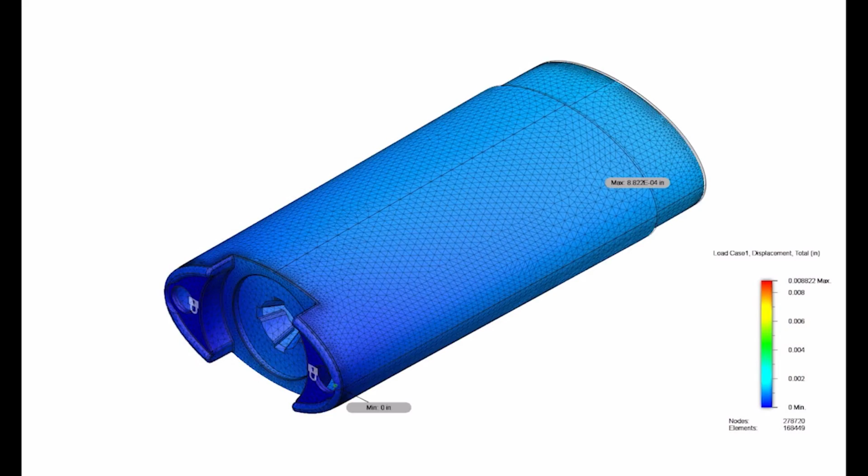As we've said before, when our customers work with Plastek, they don't get just a molder that molds parts. They get a partner in their complete package design process that includes industrial design, product design, mold design and building, molding, value-added assembly, and where desired, decorating. They also get a high-quality partner connected to some of the greatest companies in our industry that will keep you and your company on the leading edge.

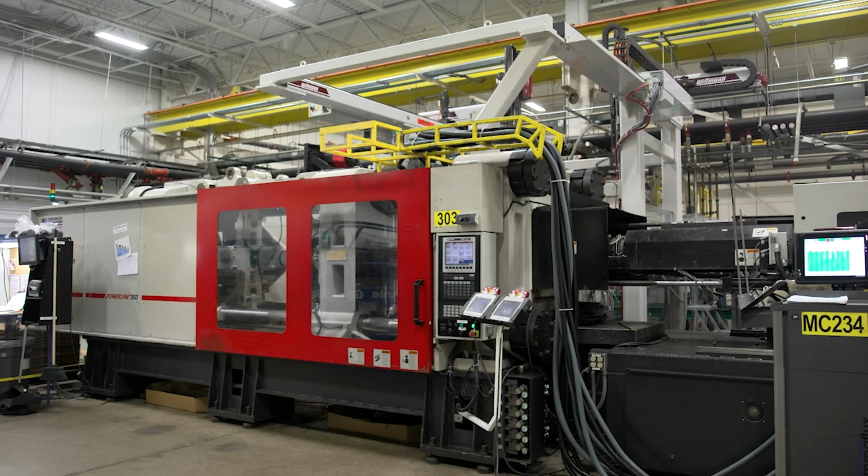Another such company is Milacron injection molding machines. Milacron has been a key Plastek supplier for many, many years, going back to our first order in 1989. Their machines have provided great productivity, and their service on the occasion it's needed is very robust and attentive. They stay ahead of the game in technology and introduce new features that continue to push the limits, help reduce energy consumption, and provide more value for our investment.

Some of their newest offerings include data acquisition, predictive analytics, and machine optimization. As we all set out to perform to the best of our abilities, it's important to have information and feedback to act upon, and having the ability to collect this feedback in a timely, efficient, and resourceful manner is something we all need. Today, I want to introduce you to Eddie Jump, Digital Analytics Leader, who will present proven M-powered applications that provide real-world results. To everyone watching, good luck and happy learning.

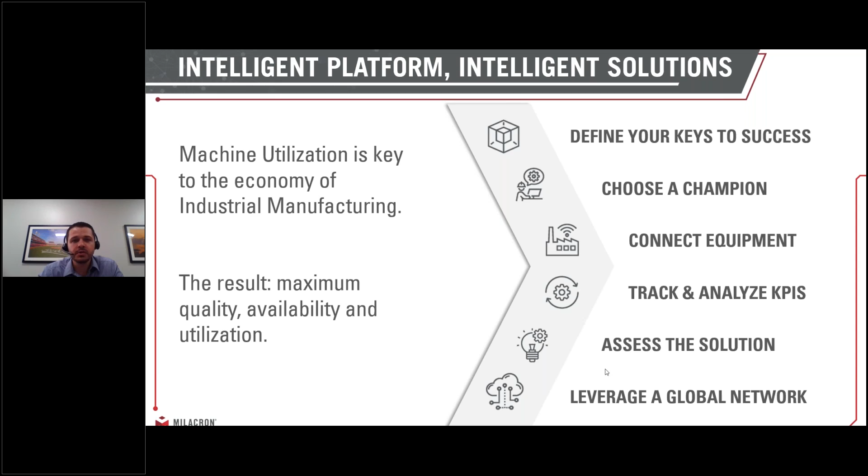From there, it's important that we continually assess and evaluate what we're doing. So we have things like dashboards, push notifications, different things we do with IT teams and our customers, so that we're making sure they're getting tangible benefit from what they're putting into the system. And then on the backside, the most important piece for this presentation, is how we leverage that to benefit all of our partners. We're building a solution that we think is how we'll service our customers and become a better partner in the future. So how do we leverage all of that and push that to all of our partners?

So our next slide here, we wanted to give you a little background on how we do it. It's important to understand what it is, but most people start asking: how do you talk to the machines? How do you deliver that information? It's really through our unique approach of devices and interfaces. Our devices, things like the Amphion and the Symphony that we've partnered with EI3 on, allow us in real time to not just look at machine data and process it, but change it on the fly. So as needs advance for the customer, we have the ability to alter those devices directly from our plant and become smarter about how we service the customer.

From there, we have an industry-leading secure platform that collects all this information and anonymizes it so our customers are safe, secure, and protected. We study that information and figure out how we can push these things back to the machines in an efficient manner. How do we do these things efficiently so that we're able to push those back to the other machines in that global network? I've got a dashboard that shows some of the ways we push that information to customers, but I'll talk about that in greater detail in later slides. We just wanted to show you some of the visualizations we create.

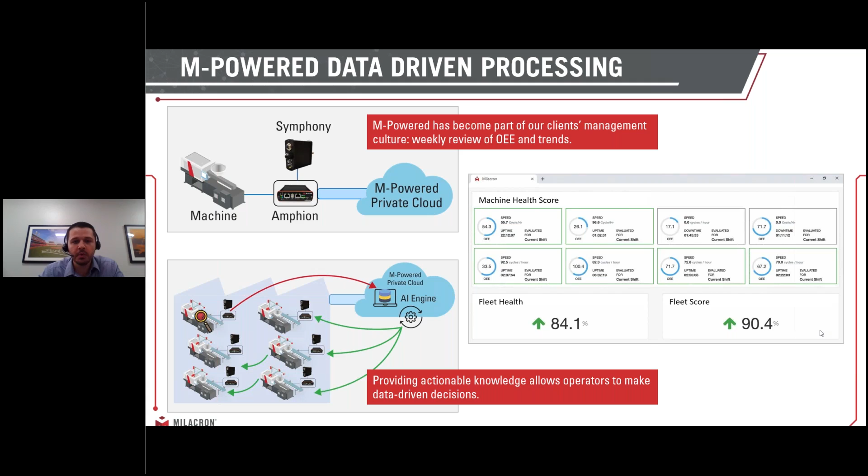Before we jump into exactly what we deliver and some use cases, I want to say at a high level where we're coming from and set the stage for what we'll talk about. The term we've coined, that we really love and use more internally than even with our customers, is Plastinomics - making sure we're focusing on the economics of molding for our customers. I think everybody understands what safety, quality, delivery, cost, and even sustainability mean. But being able to keep that in mind and make good economic decisions through the data to improve each of those metrics, and not just improve them but do it in an economically sustainable way, is very important for our customers and our partners.

So before we jump into each of these categories and discuss how we help with our applications, I'm going to turn it over to Lacey real quick for a quick poll.

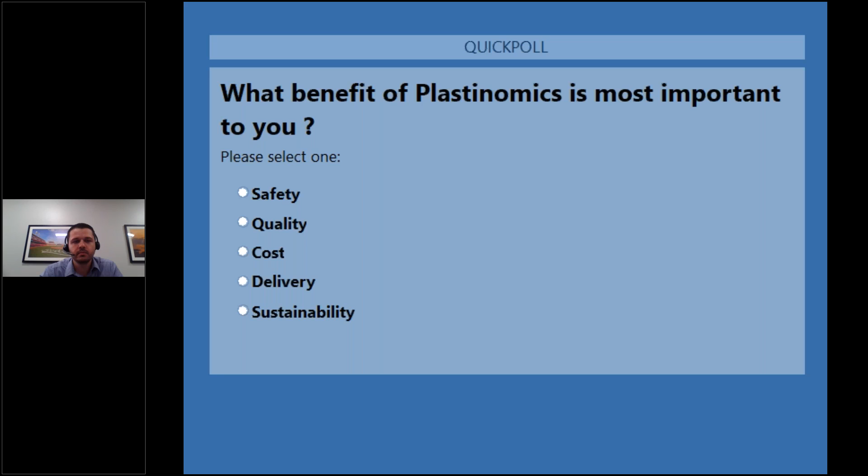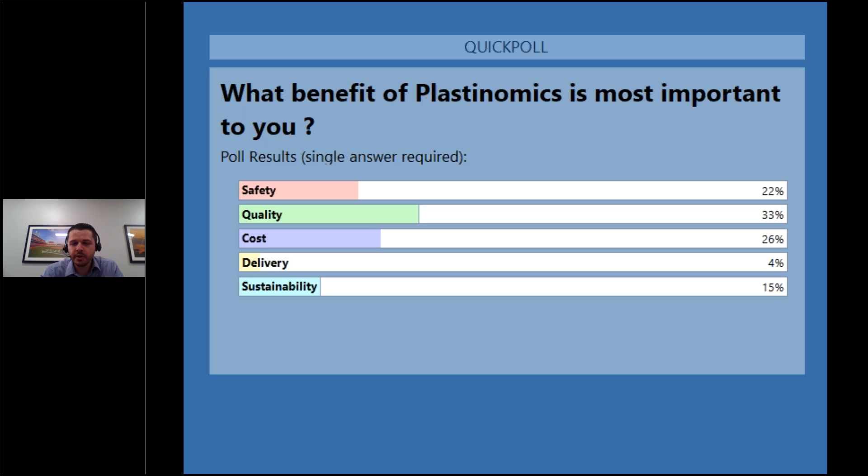Alright, let's close this and share the results. It looks like, Eddie, we have over a third of our audience speaking to quality, and then the second was cost, and the third highest is safety. This is great, and I appreciate everyone's feedback. I'll try to spend a good amount of time on the ones that I know are most relatable to this audience. So we appreciate the feedback. Thanks, Lacey.

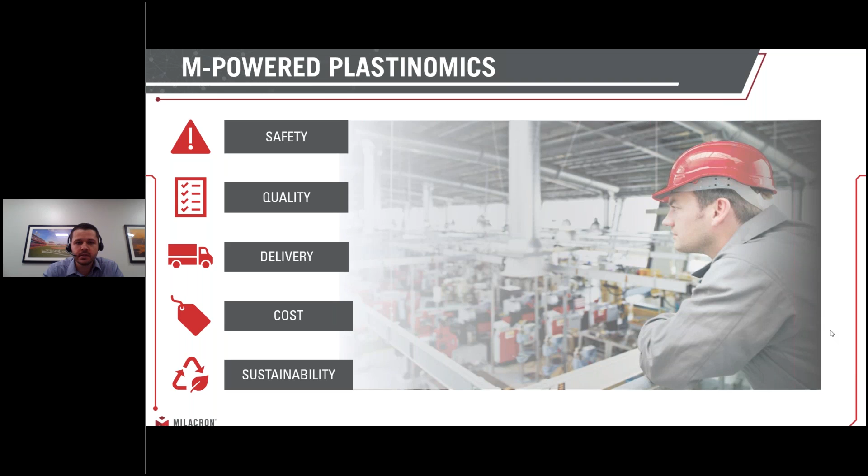All right, so first we're going to start with safety. With safety, there's a lot of things we can bring into the space with our platform and these devices. When we first started the system, really what we wanted to do was find a way to connect our technicians with our customers quickly. It's very important for our customers and for even their end customers that our machines are always running. With that, our platform allows us to safely and securely connect back to our customers' assets.

So it's a fantastic tool for fixing issues remotely. We actually find in two out of five of our issues we can fix completely. And the ones where we can't, we're sending technicians into the facility with the correct tools, the correct information, correct parts if necessary to fix that problem and reduce the downtime. The way we're basically moving into the 21st century, especially with things like COVID in mind, is how do we take advantage of tools like this so that we can not only do that for Milacron, but also do that for our partners.

So we're expanding this toolkit continuously so that even our customers can get access to screens remotely from their desks. In a world where we have a second resurgence, and we're not to the point yet where there's a big cure out there, we need to make sure our people are safe and they can still get out and make components. We like to make sure that if you need to operate with 20 people on the floor versus the 40 or 60 you're used to, you're able to do that, with those same tools sitting at your desktop as if you were standing there by the machine.

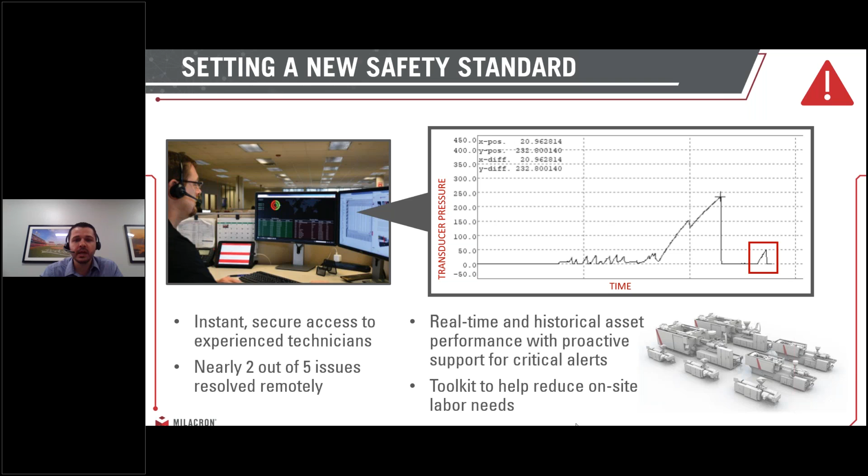So not only can we connect, but you can grab the information, the real-time process information, as well as seeing screens and guiding. I'll talk a little bit about some of the ways we're also grabbing that data so that we can take some of that legwork out altogether and push things to our customers here in some of the later slides.

All right, so this seemed to be the highest on the feedback scale. We appreciate, again, the feedback, and that allows me to dig a little deeper and spend more time on this slide and discuss how we are helping on the quality initiatives of some of our customers.

So we mentioned a little bit about how we're collecting the data. Our devices allow us to advance and learn and grow with our customers in real time. If we're not grabbing the right things, if we're not detecting the right things, it's really important to have a system in place that can not only grab that information, but change that information on the fly. If you're not pulling it at the right frequency, if you're not getting the right pieces of information, you're not going to have the right answer when it's all said and done.

So our platform, we try to keep that flexibility in mind. And then with that, we've got our private cloud interface that allows us to interact with the data in so many different ways. One of the things we've learned as we work with customers that have large scale operations, when you start talking about 40 or 50 or more machines, it's very difficult to manage process control. There are great tools within our machines that allow us to see how they're performing when you're standing there walking around, with a big workforce that can do that on a daily basis. But seeing the changes that are occurring and then combining that with quality feedback in the cloud, we have found actually helps customers improve quality from day one.

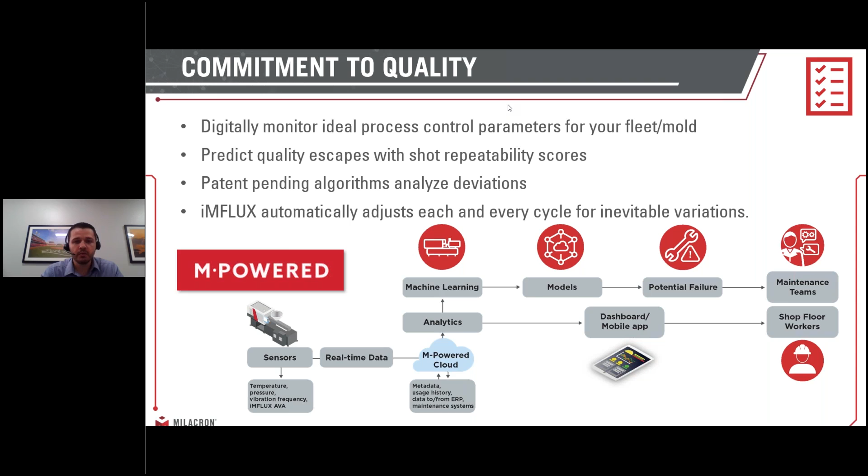As resin starts to change, you can't always guarantee that unless you're running complete virgin material with great systems, no environmental factors, you can't always guarantee what's going in is going to be the same. So there's constant tweaks on process parameters. With this technology, we're able to adapt the machines in real time and make sure you're getting adequate part weight and an adequate part out regardless of the input.

All right, so moving on to delivery. We really focus on delivery in several aspects, but really it's through performance and availability. Our tools are all about how do we help touch the customer on an automated level so they're not having to continually push information into the system, but how do we figure out that performance, availability, and quality in real time.

Then put tools in their hands so they're not having to take the machine down on an unplanned level. So basically we have smart tools built in. We have a growing number of predictive components that we monitor so that when the machine is running, we know based upon your usage and what the data is telling us when things are due, and we can tell you what that looks like from a holistic view, not just on a machine basis.

So great, I've got a tool built into the control, but seeing how that works in correlation with the other 40 machines I have running can be very difficult. So we have tools built into this platform that allow customers to say, okay, it's PM time on the 1st of the month, let's knock these 10 things out that we know will probably come due during this month, or based upon the data it says I need a new screw, I need a new screw tip, so we're not having to take the machine down halfway through a run and cause a late delivery.

So these components, again, we're trying to shift from that preventative side to the predictive side. It's growing, and we've got a lot of customers using those today and being more productive because of it.

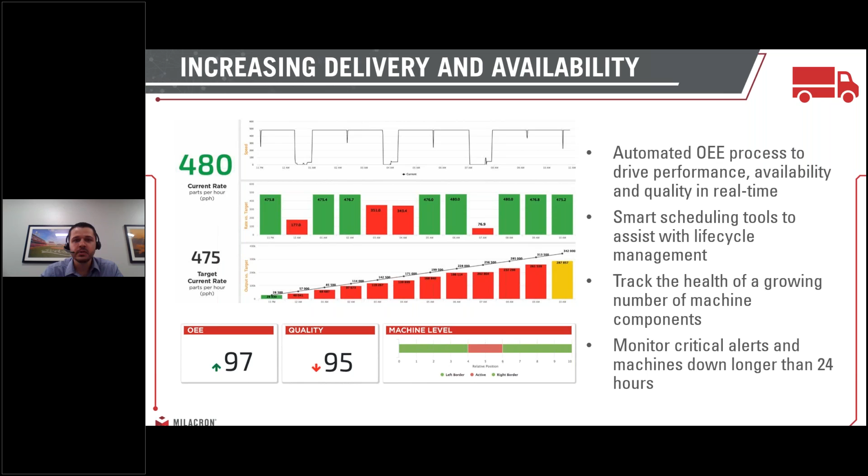So we're always looking for ways to improve that, reduce the downtime, and help customers improve delivery.

The last two slides before the use cases talk through cost and sustainability. This is where I get really excited, because I've gotten to basically live and breathe M-Powered and how we've advanced the product over the last three years, since NPE 2018 when we debuted M-Powered as a whole.

So we went from a technology that helped customers just categorize OEE, trying to help understand the basics of molding and dig kind of surface level, to putting more of our machinery-based knowledge into the system and helping customers reduce their downtime altogether. This really speaks to that.

As we went, I think we hit year two, and we said let's start putting that to use and see if we can have predictive analytics that'll tell customers when screws, heater bands, pumps, feet, and screw tips fail. That quickly turned into, great, we've got this analytic running, it'll tell a customer when we think it needs replaced, but the machine's still running, it's still making good parts. Why would I replace it? Why does that make sense?

This screen really speaks to what we've done and how we've advanced that as far as the screw analytic itself. As many people know, a screw is a part that's not necessarily going to cause a critical failure—you can still make good quality parts. It might not necessarily increase your cycle time until it's really at the worn stage where I can't get a good part out of the end.

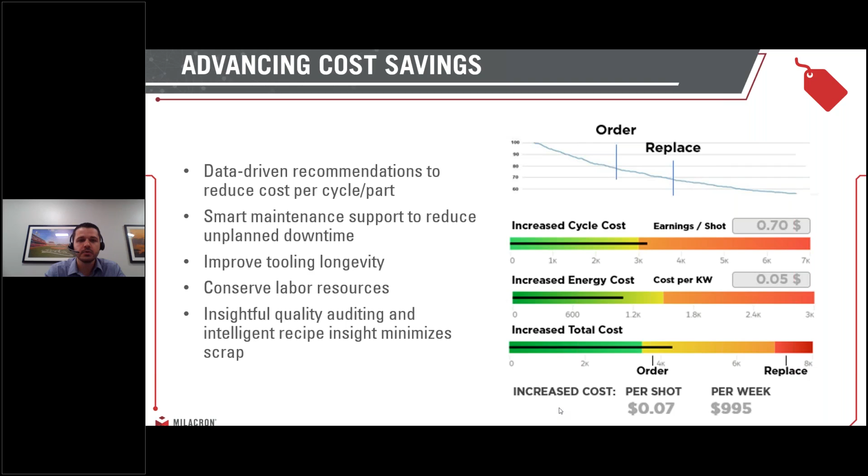Our last main topic here is the sustainability side. I saw this was something that wasn't quite the number one, but it's definitely important to this audience, and we can tell it's important to a growing number of people out in the industry.

What we want to do is not just look at sustainable strategies, but again relating back to plastonomics and making economical, sustainable goals—not goals to just go out and say I want to save all of the environment. It's, I want to save the environment, but I want to do it in a cost-effective manner so I can keep my employees, keep my machines running, and still improve the bottom line while being more beneficial to the environment and everybody around me.

So things like iMFLUX, like I mentioned at the beginning—we've got a partnership with iMFLUX, and using that technology that adapts the machine in real time, that actually allows you to use a wider spec resin, more recycled and renewable materials with the same machine and the same componentry.

So it's a key driver to our initiatives and what we're pushing forward to.

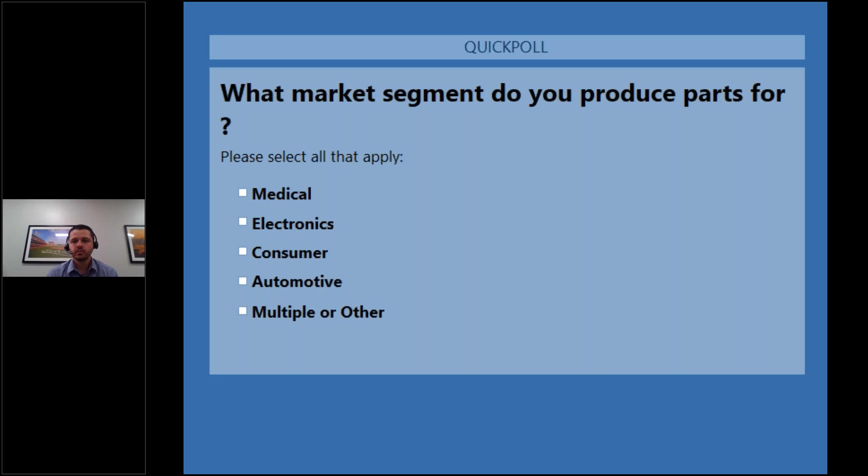Great, that's very helpful. Again, we appreciate the feedback on the poll questions, and I think that's going to help me discuss and talk about the 2 use cases we've got coming up here, but then also about how these are applicable in other environments and other things that we've done with them.

So our first use case that we want to go through is something we've done with a medical customer of ours. We found that they were getting quality issues that were not getting captured completely by their vision system at the end of the line. It was something they could very clearly find - there was not a big scare for things escaping, but at the end of the day, it was very frustrating that they've got all these expensive systems. The machine is doing what it's supposed to be doing, and yet on the other side, they're still having to spend all this time sorting out potential bad parts.

So what we did is we set up a study with them to collect data and track when these issues were occurring. First, we were actually able to see through multivariate analysis when certain things were happening in that machine. There were 4 or 5 variables that would tell us when they acted in a certain way, this quality defect was going to occur. So we're working on - and I can talk to the upstream of that and how we're going to alleviate that altogether.

But in the interim, until we can get to that point, we worked with their system and their team to develop a diverter system. So every time that we saw this pattern occur in the machine, we're actually able to divert these parts before they ever even reach the vision system or the outside when the components are coming out and dropping into their bin.

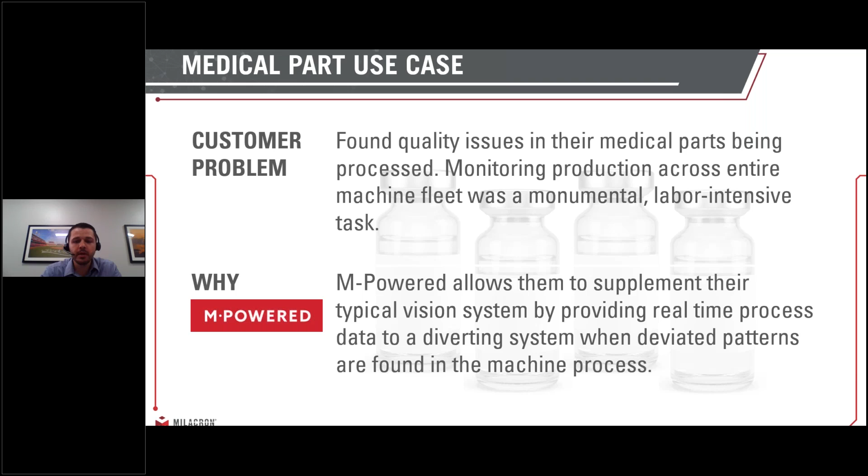So this is a good example of the system helping them have less touches on the machine, so being safer by being at the machine less, having less operational touches. From the quality side, being able to show them as soon as these deviations start to occur.

It's not something where we're necessarily adapting the machine today or fixing the resin so that it's not happening as much, but we're able to show them as soon as it happens so that they can get out to the machine and maybe only make a few bottles with this bad process and get it adjusted, versus having maybe 50 to 100 of those come out.

We're also helping improve their delivery by making sure they don't have to touch the parts as much on the other side, being able to put these more effectively onto the finished goods section. And then last, through labor savings by not having to have somebody out there as much on quality. They still do plenty of quality checks, but this did reduce the need for as many secondary checks, or as often on the secondary checks.

And this is completely applicable, and we're doing other things for other market segments as well. So customers in some of the other segments mentioned, we have the ability to take the things we've done here, and even in certain custom molders, we've gotten to the point where we're monitoring these processes for them using SPC controls and doing things very similarly - not just detecting when the machines shift, but also helping them detect when parts and components are shifting because of changes to the process.

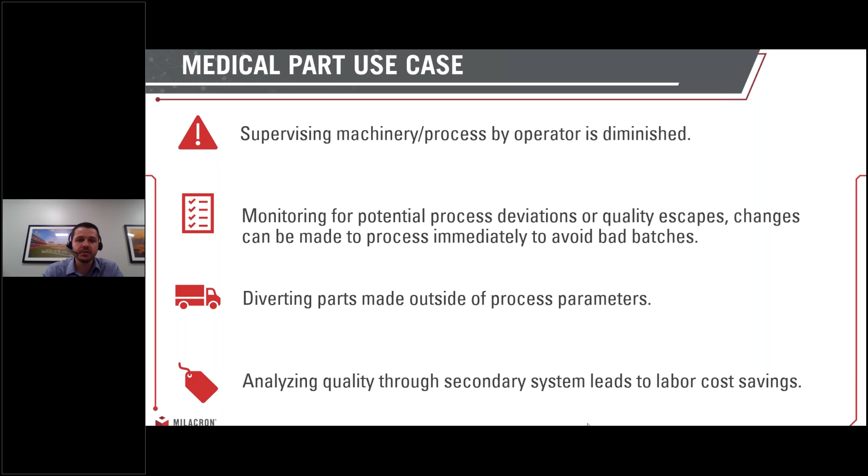It's a very tough thing to have training for maybe 20 or more process technicians if you have a large facility, and this really can highlight those deficiencies. So not only are you seeing where the machine is escaping quality, but also with the users themselves.

All right, and for our last use case here, this one focuses on the automotive segment. And with this, we had a customer - and I think this is why it's so applicable to everyone - that really has a great system for tracking and monitoring their downtime.

They do a really good job at trying to phase out all the reasons why their people take the machines down, all the reasons they can affect or put a cause to and effect for why it's going out of cycle or why they're not making as many parts. So we worked with them to say there's still a large amount of downtime, and asked if they could use their knowledge and machinery expertise to help us quantify these other large areas and put things in place to alleviate those.

So we focused on connecting them, analyzing what the machines were doing, and focusing on critical components that were taking the machines down based on operational uses or common failure items that fail or wear on machines. We actually developed a system that identified 5 key components that would cut their downtime by 75%.

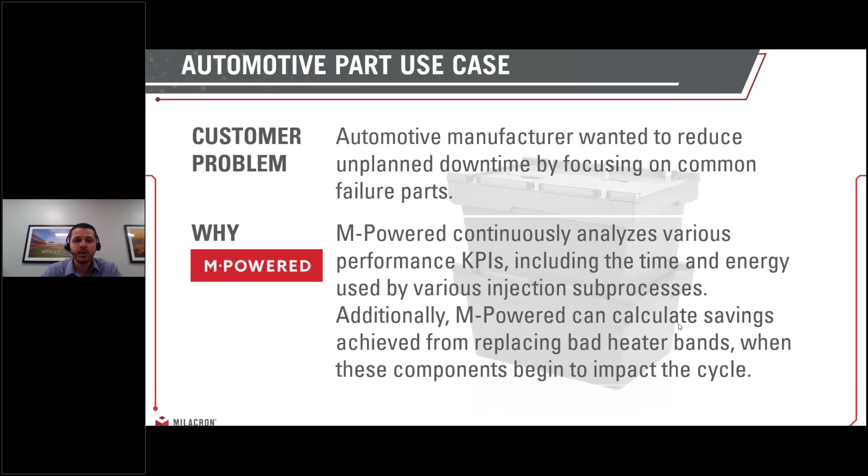And that's really what we've been doing with them - on the first of every month, using these tools to look at things like bad heater bands and other things affecting our cycle or that will impact our cycle during the next run, and getting those changed. So this is the one we mentioned with the heater band as well.

This customer is gaining major benefits in several areas because of this study. Not only are we avoiding unplanned downtime for that customer because of these studies, but as a result of everything we're doing, they're also getting better quality on the other side, because we were studying how the machine was adapting as these things change.

How are people adapting the machine? We're really helping them improve part quality through fewer changes, and changing the components when they actually need it instead of trying to process around them.

Again, reducing their unplanned downtime and improving their delivery and how they can operate their machines through smart maintenance programs. As we showed in the example, we have several examples running for this customer - lowering cost and making them more sustainable by focusing on components when they need to be replaced based on their specific needs, as well as helping conserve energy and benefit the environment from that perspective.